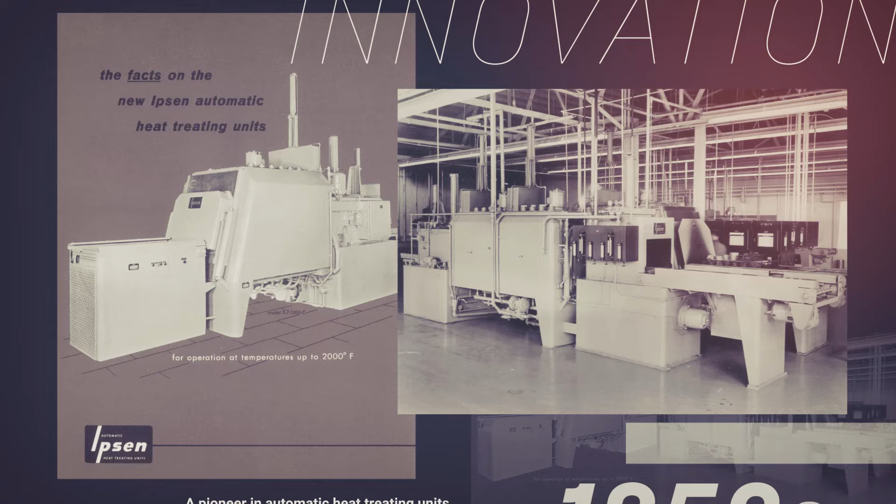Within a few years, Ipsen was a recognized pioneer in the heat-treating industry, offering furnaces which promised more uniform metallurgical results, greater production capacity, and lower operating costs.

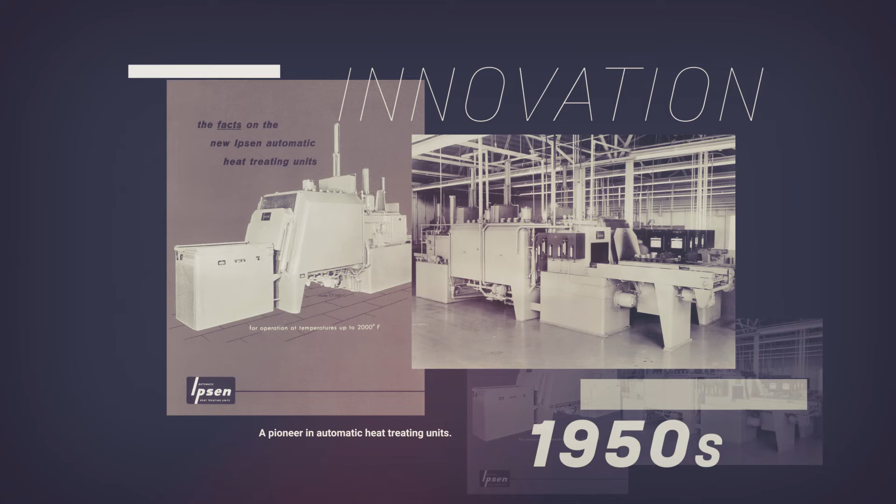By the late 50s, having already created its Ipsen Ceramics division for materials development and Ipsen Lab for metallurgical research, Ipsen was setting its sights on growth outside the US. They first expanded to Canada, then later to Germany, where Ipsen furnaces supported West Germany's steel industry in the Ruhr Valley.

By this point, Ipsen furnaces were used in the manufacturing process of everything from typewriters and washing machines to automobiles and airplanes. In the post-war era, technology was becoming a part of everyday life, and heat treatment was a key part of producing almost anything made of steel.

To accommodate its ongoing growth, near the end of the decade, Ipsen opened a new facility in Cherry Valley, Illinois, where its U.S. headquarters still operate today.

During the early 1960s, the Cold War and space race drove further innovation. In addition to its traditional products, Ipsen developed more sophisticated furnaces for the production of missiles, space probes, advanced aircraft, and rockets. The Ceramics division was producing materials for the government's nuclear energy and defense programs, and Ipsen Lab was working with NASA to study exotic metal foam applications in spacecraft.

Business was booming. Late one evening, in the spring of 1965, Harold Ipsen died on impact as the private plane he was piloting attempted to land at the Greater Rockford Airport. He was 49 years old and left behind a wife, 3 children, 30 patents, and a legacy as the most innovative heat treater of his era.

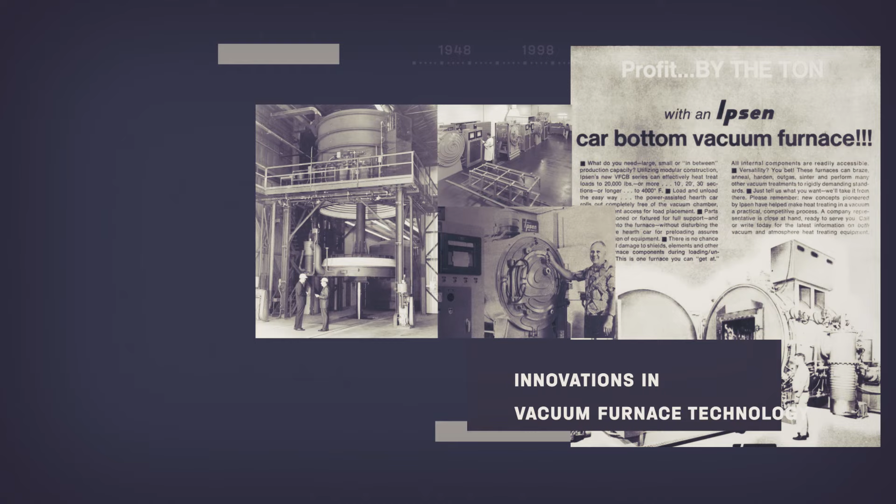Under new ownership, but consistent with its history of product development, Ipsen introduced the first bottom-loading vacuum furnace in 1966, the Metal Master Furnace in 1967, and the Vacuum Oil Quench Furnace in 1968.

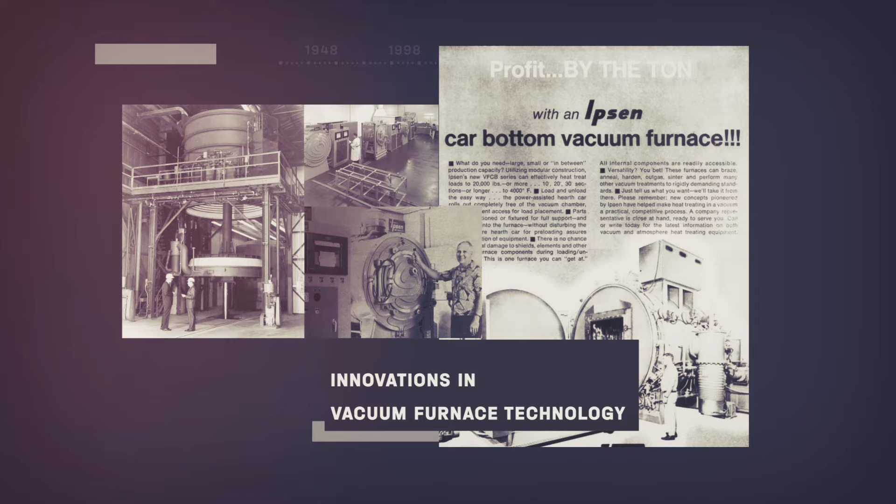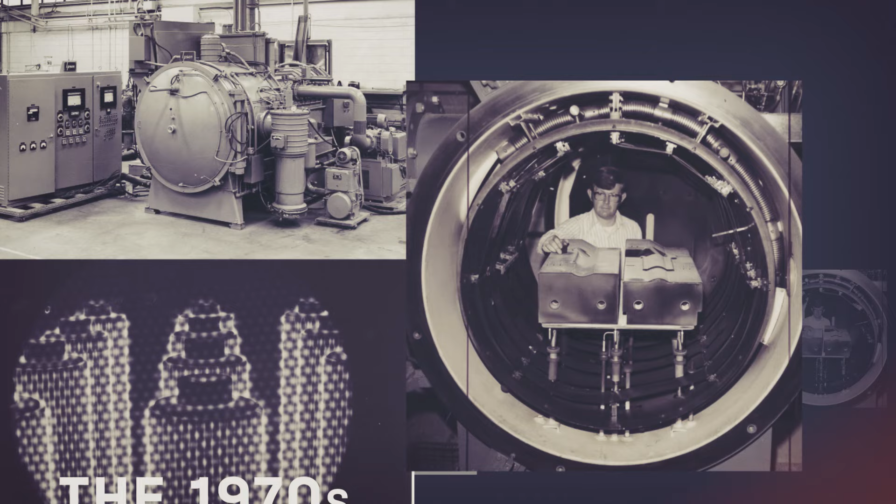During the 1970s, Ipsen innovation continued. Batch and continuous vacuum aluminum brazing furnaces were developed, diffusion bonding and ion nitriding furnaces were introduced, and the first vacuum tempering furnace was sold.

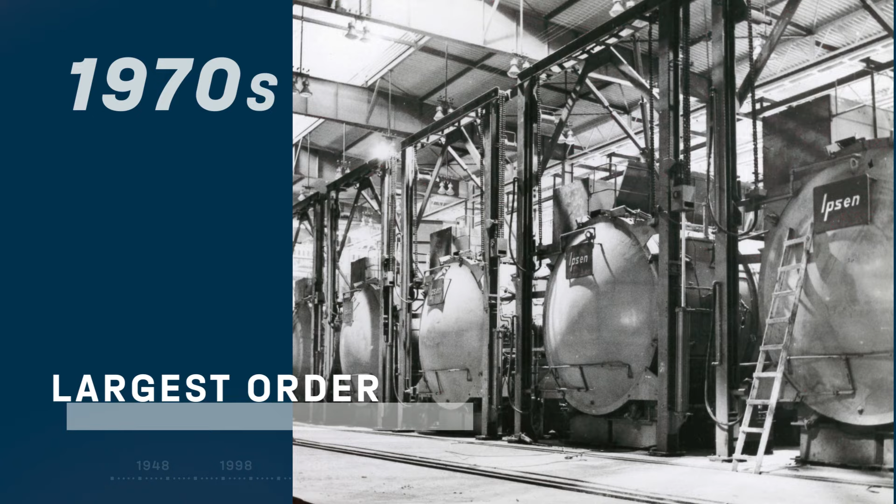Ipsen wrapped up the decade by receiving its largest order to date, when a Polish steel company purchased 10 horizontal vacuum furnaces. The 1980s began slowly, with an economic recession, high interest rates, and an accelerating shift in the U.S. market from manufacturing to service.

Still, promising new technologies were emerging, and the 80s introduced us to stealth aircraft, the first space shuttle launch, cell phones, and dramatic advancements in personal computers.

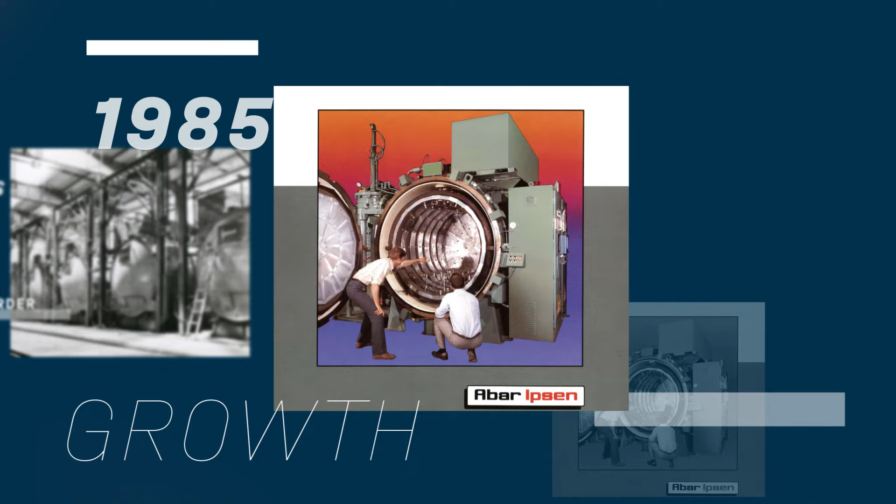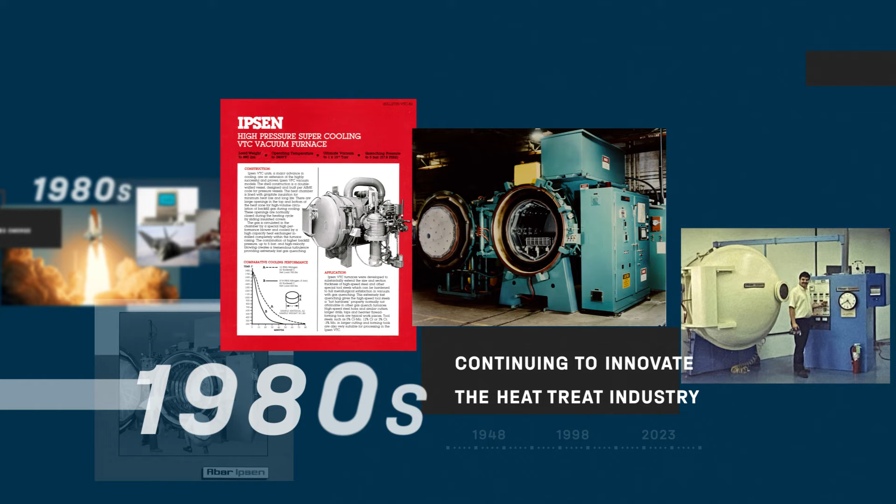In 1985, Ipsen merged with competitor ABAR, becoming ABAR Ipsen Industries. The consolidated companies continued to innovate, and during the last half of the decade, released the world's first 5-bar vacuum furnace, the all-new turbo treater, and the invention of the Ivadizer, which replaced environmentally toxic cadmium plating with aluminum vapor deposition.

The 1990s saw continued economic growth, marked by significant advancements in telecommunications and computing. With a focus on international expansion, Ipsen opened multiple sales and service locations around the world, as well as a manufacturing plant in Shanghai, China, to support the growing customer base in Asia.

Back in the US, Ipsen established strong partnerships with customers such as Boeing, Caterpillar, and Chrysler. After a successful decade of assimilation, ABAR Ipsen Industries became Ipsen Incorporated.

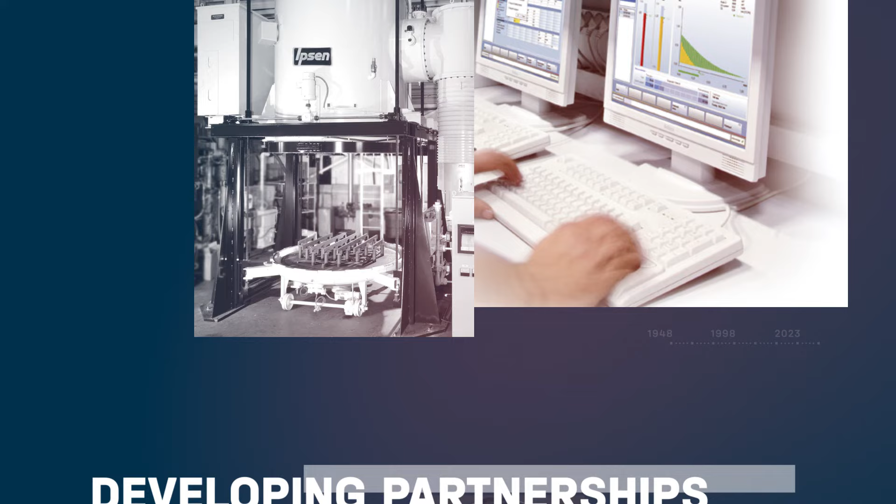Ipsen started the new millennium with a reinvigorated focus on growth and innovation. The global VR furnace was launched early in the decade, and software upgrades enabled better service and connectivity to customers via the internet. In what was a new, largest ever order, John Deere Waterloo chose Ipsen to supply furnaces for their massive new drivetrain shafts and gears program.

Ipsen then acquired Vacuum Furnace Systems Corporation in Souderton, Pennsylvania, expanding its staff and facility to increase hot zone production. Extending its global reach even further, new plants in Japan and India were opened.

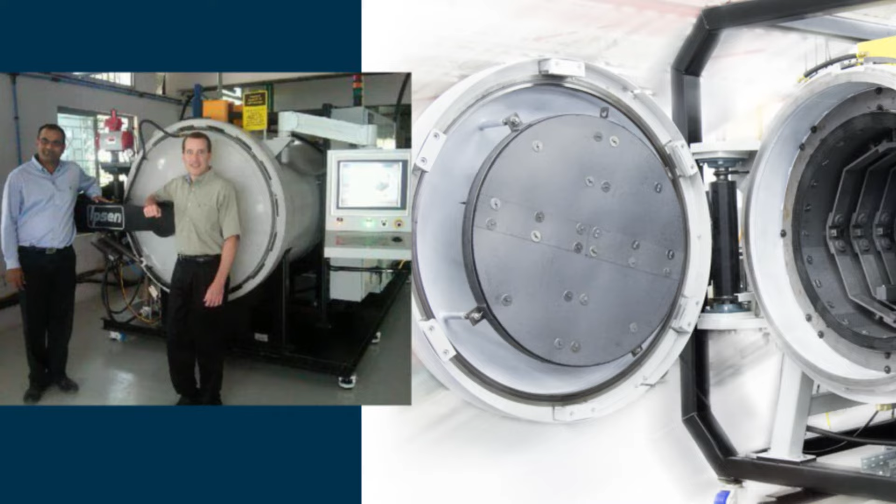Finally, and arguably most significant, Ipsen attracted the attention of heat treaters everywhere with the 2009 launch of its new from-the-ground-up Titan furnace, a high-quality platform product, a better, faster, and higher-value furnace built to global standards with a smaller footprint, quicker delivery, lower cost, and easier installation. Still going strong almost 15 years later.

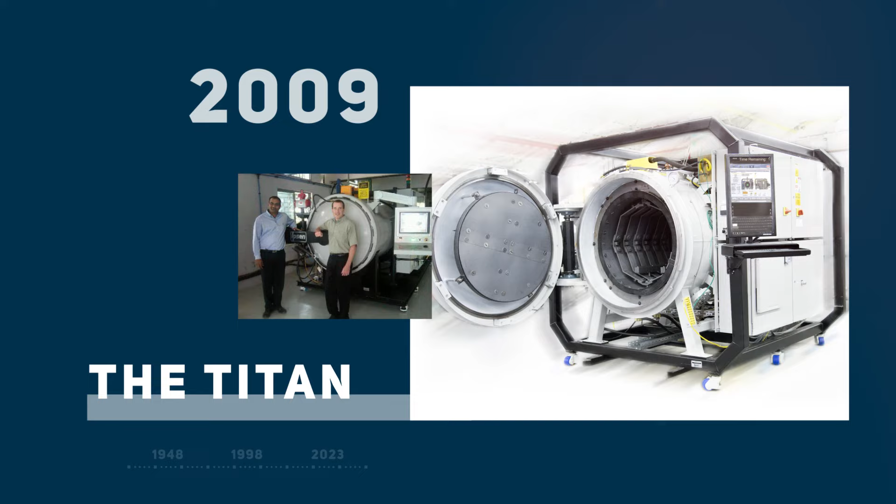The 2010s witnessed an acceleration of private space exploration, as well as electric vehicle production. Manufacturers placed more importance on adopting sustainable business practices and improving processes to minimize waste and lower operating costs. During this decade, Ipsen ramped up development and sales of furnaces for customers in the growing additive manufacturing industry and introduced PdMetrics, a groundbreaking predictive maintenance software.

Then, 2020 and the global pandemic. Ipsen tenaciously supports its customers, especially those in critical industries such as medical, transportation, food and beverage, energy, aerospace, and defense. Ipsen also used this time to reorganize and optimize its business structure, improving efficiency, becoming more responsive, and consolidating manufacturing.

Today, the Vacuum Technology Excellence Center in the U.S. and the Atmosphere Technology Excellence Center in Germany enable faster-paced innovation and a laser focus on performance and quality.

Looking ahead, we see a future filled with opportunity. Ipsen is committed to embracing digital transformation, sustainability, and expanding customer service offerings to ensure that their legacy of success and innovation endures for years to come.